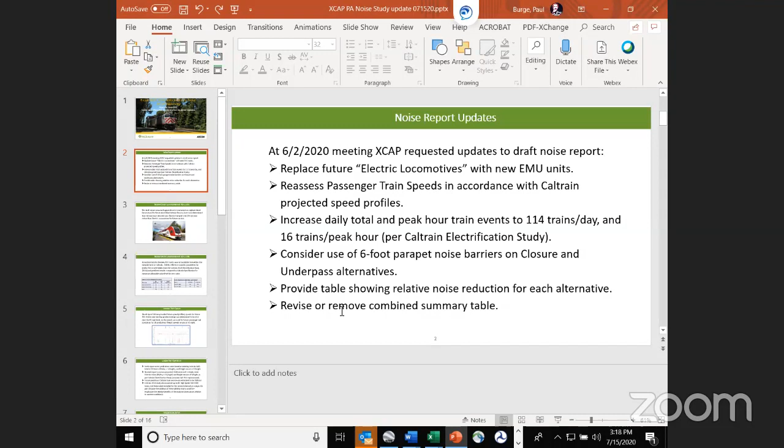Consider use of 6-foot parapet noise barriers on the closure and underpass alternatives, similar to the ones used for Viaduct and hybrid. Provide an additional table showing the relative noise reduction for each alternative in addition to the actual noise level. And revise or remove the combined summary table at the end of the report. And we did each one of those.

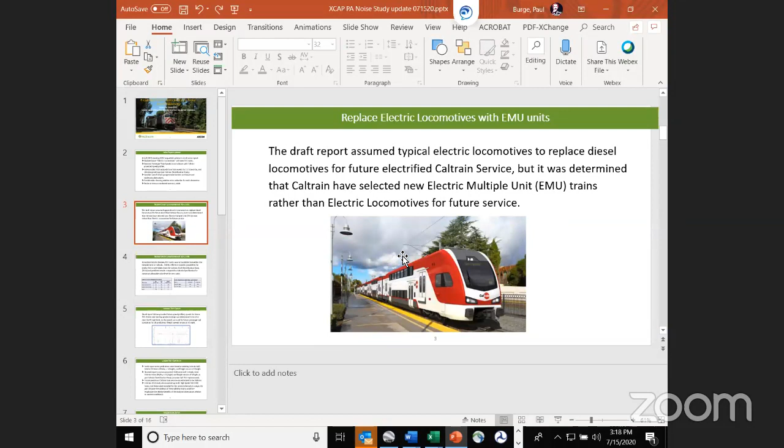So first, with the EMU units, we found out shortly before the original report that in fact they were proposing or planning to use electric multiple unit trains, EMUs, rather than electric locomotives for future use. And so we went ahead and did that. We tried to get acoustical data from the manufacturer for those. It was not available through either them or Caltrain.

But as a fallback, we used the same reference information that was used in the 2014 Caltrain electrification study, which are shown below. And we made sure that if we use those coefficients and reference levels, they would in fact meet the Caltrain specification for the new EMUs, and they do. As you can see in the table, there's two specifications: one is up to 50 miles an hour, one is up to 80. In each case, our predicted levels were at least slightly less than the allowed level. So we thought that was appropriate.

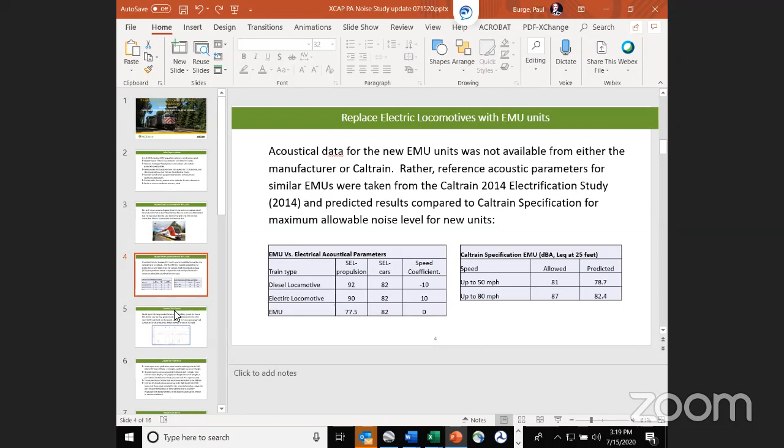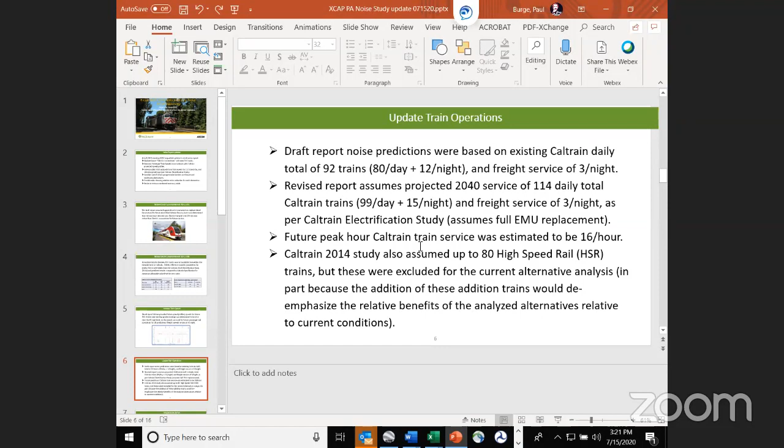Regarding these parapet noise barriers, we were asked to consider using those same 6-foot noise barriers because they were fairly effective for the viaduct and the hybrid alternatives, and they were already part of those alternatives, to also consider using those for closure and underpass alternatives. So we essentially added 2 new alternatives: underpass with barrier and closure with barrier.

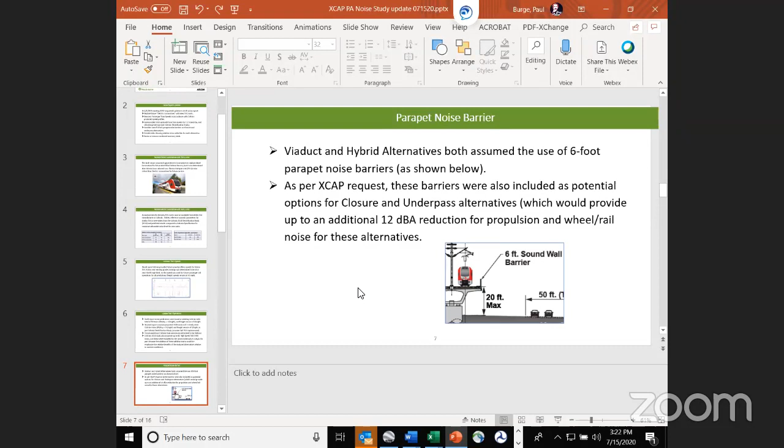You also asked us to include a separate, additional table. Right now, the table we have shows the actual predicted levels for each one of the alternatives. Some folks said they thought it would be beneficial if we could show that same data as the noise reduction over existing. So we added an additional table just after the first one that shows the relative noise reduction as opposed to the actual noise level. That's in the report.

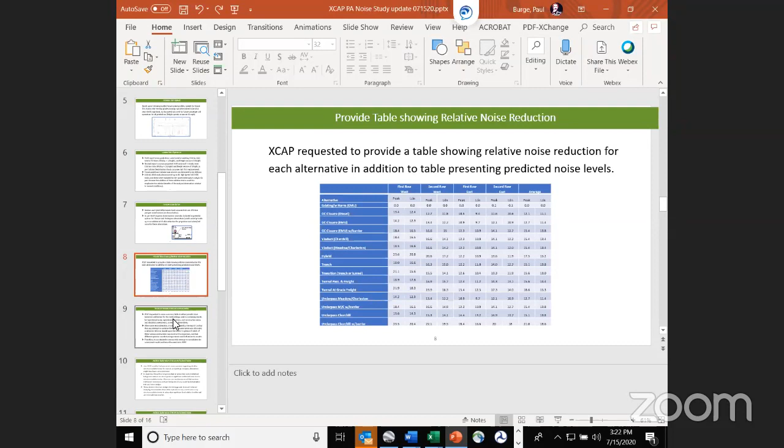There was quite a bit of discussion, probably more than everything else, about the summary table in the original report. This is where we made an attempt to combine the assessment for operational noise, operational vibration, and construction noise and vibration into kind of a single ranking. Some of the comments and concerns were about the weighting we gave - we actually gave more weighting to the operational noise and less to operational vibration and construction noise and vibration.

But after some discussion and some inner reflection, I came to the decision that really any attempt to combine those together into a single assessment would be flawed, and that it included some judgment or value judgment based upon whoever was doing the combination of which of these aspects were more or less important than the others.

After thinking through, I think maybe that wasn't so technically defensible. So I think it was best to just leave that out and leave that to your committee to make those assessments independently, along with everything else you had to consider: cost, traffic, safety, those things. So we just decided to leave that table out.

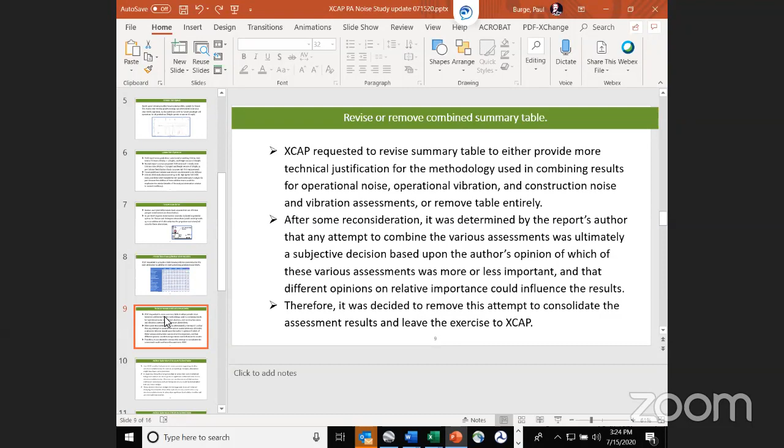I also had a question originally from Keith on one of the questions from the last meeting, and a couple of follow-up emails. Keith, I apologize for not responding to those emails, but I was under the impression that might not have been appropriate to do. I did want to include a little extra identification information on that. Keith had suggested that there would be some radiated sound as the train went over the viaduct, perhaps, and that in fact is probably true.

But I wanted to express that there are several different types of viaduct structures. Some of the older style - not old like 100 years old, but old like in the 60s and 70s - were primarily metal. They can radiate structural vibration noise much more efficiently than some others, because they're fairly lightweight, fairly flexible, and have very little damping. But more modern structures, based on the photos and renderings we were given, and the way modern rail structures are designed and built these days, are based more on reinforced concrete structures. They tend to have much greater mass and much better internal damping characteristics than older style metal structures, and would help reduce the structure related noise.

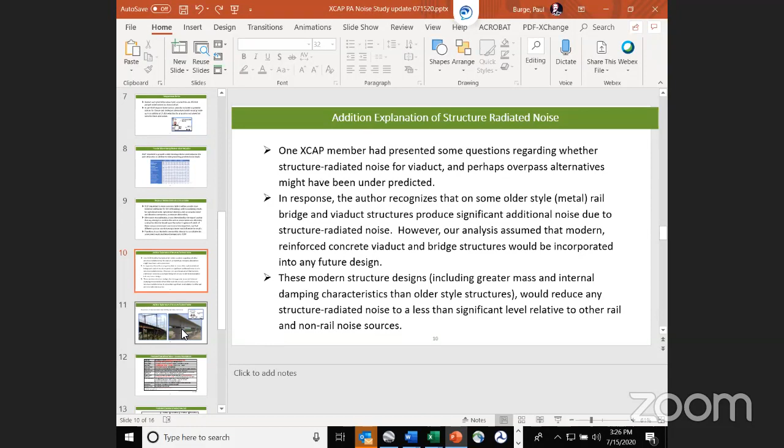I did include a couple of pictures as examples. This one on the left would be typical of a metal viaduct structure or bridge structure, and you do see these around. This is an electrified one, as you can see, and these things are very lightly damped, and lighter weight than the more modern structure, so they do tend to have their own noise source, and it can be, some of the studies I've seen, 15 to 20 dB louder than a corresponding modern structure we show here on the right.

I was surprised that I found a picture of one which is very, very similar to the one that's depicted in the drawings. You can see it's much more massive, has much more mass to it, so it is less likely to have a sharp vibratory resonance.

You can also see that, in fact, in this one here, and as suggested in the drawings we have for the proposed design, they actually do have some bridge bearings in there, which supply some additional damping and isolation. So it would have to be built into the design that these would not vibrate, but most of these modern structures are built that way. In fact, they even usually have ballasted track on top to help reduce the vibration right there at the wheel rail interface.

This is another table that's already in the report, and I highlighted in red the things that changed from the original report. So to repeat, all passenger trains are now 80 miles an hour. Train consists are for 6-car EMUs with 3 powered cars rather than the electric locomotives. Daily trains have increased to 114, which is 99 during the day, 15 at night, same 3 nighttime freights. And I think we increased from 10 to 16 the number of peak hour passenger trains.

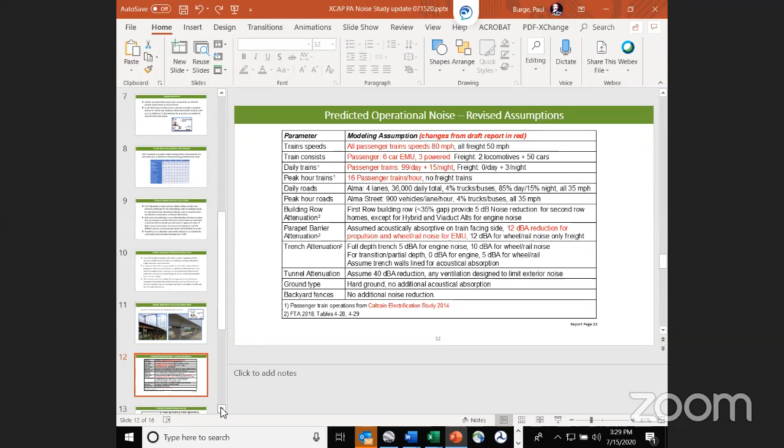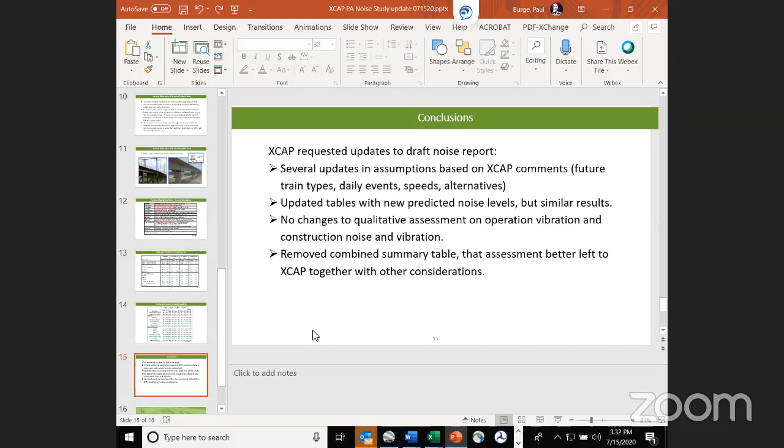And I think that's my report.

One question is about your speed chart where you concluded 80 miles an hour is sufficient, since we didn't get a good look at it beforehand. I know we have trains that stop in Palo Alto and don't stop again until Mountain View. So it looks like, if I'm reading this chart right, those trains could theoretically reach 110 miles per hour.

Well, I was told that regardless of this chart, the maximum speed for the EMUs would be around 80 miles an hour. So while some of them, according to this chart, could from a performance standpoint top out at like 110 miles an hour, I was told separately that they would max out at 80. So I drew a red line across there saying that's as fast as they were going to get.

But obviously, the fact that I drew in the vertical red lines here for where the grade crossings were -- by the time you get to there, the trains are mostly up to that 80 miles an hour. So we conservatively said they'd probably be running at their maximum level at that point.

My understanding of Caltrain, and I think what Nadia's told us before, is that they don't intend to raise the speed limit. But it sounds like with the EMUs, they technically have the capability to make the trains go 110 between as they go through Meadow and Charleston, and that might be something we need to get an answer on outside of this process. Well, that's maybe less relevant for noise and more relevant for safety.

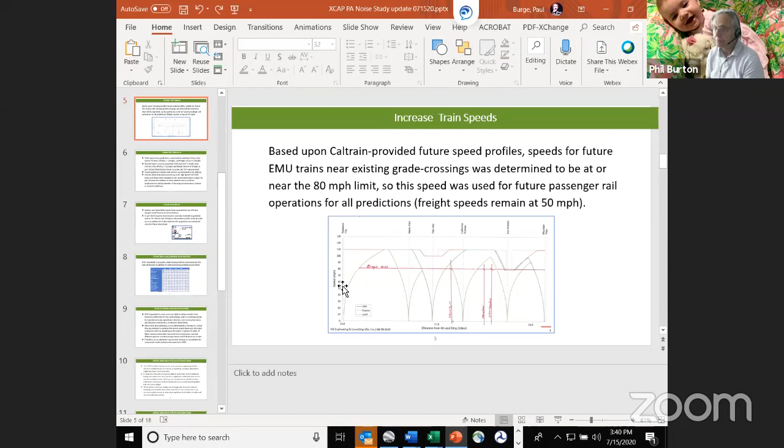Yes, in fact, I would agree that you see that on these speed curves at all these grade crossings, the train can get up to its kind of revenue limit of 80 miles an hour, but that's probably not true for the current diesel locomotives. They would have a different speed profile than this, I think.

Go ahead, Keith. Okay, very good work, overall you did a very nice job. I have some questions on the resonance, thank you for addressing that. But I have a quick question: you mentioned there were 3 effects that by and large kind of cancel each other out. What were those 3 effects again?

Well, they tended to work against each other. Switching from the diesel locomotives to the EMU units, if that was the only change, all the numbers would have decreased because the EMU units produce less noise per pass by, so that would have reduced all the levels. Increasing the speeds, regardless of what type of vehicle you use, wheel rail noise increases as a function of speed, so increasing from 50 to 80 miles an hour would cause the noise to go up.

And then the total number of trains, which we originally assumed using the current 92 Caltrain events per day, went up to 114. That would also tend to raise the overall peak hour levels, because we went from 10 to 16 trains per hour assumption for the peak hour, and from 92 to 114 trains total per day. So the change from diesel locomotive to EMU puts noise levels down, the increase in speed pushed them up, and the increase in number of events also pushed them up. So you had 1 down, 2 ups, so they at least partially canceled each other out.

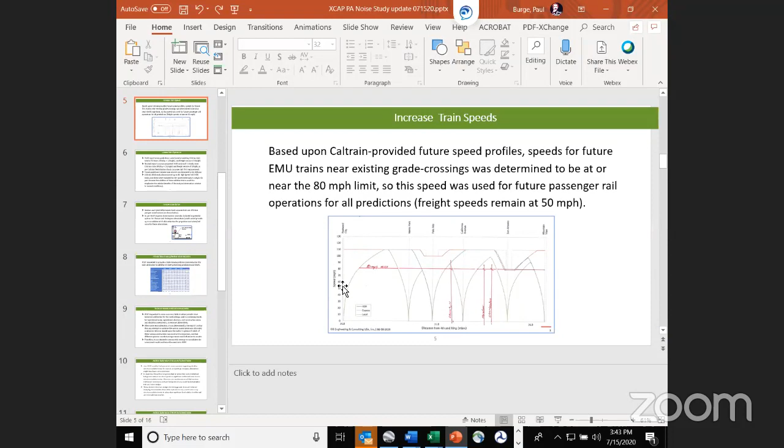But 5% damping is not that bad. I don't think it's linear such that 95% of the energy gets through, but it helps flatten things, kind of like we've been seeing with coronavirus curves—flattening the curve. The idea is everybody wears a mask and it reduces that big peak and spreads it out, so you may have the same number of cases but the hospitals won't get overwhelmed. Same thing with structural resonance: it reduces the peak to a much flatter response. You might have the same amount of vibrational energy, but it's spread out over a wider range of frequencies, which tends to be less annoying.

Well, but you still have resonance, right? It's 5%. If you look at the curve, that's going to be a 10 times magnification at resonance with 5% damping. I also want to suggest there will be some resonance noise, but anytime you're talking about a variety of noise sources, it's the one that controls the noise you actually hear that's the dominant noise source. And if you have the dominant one, the next dominant noise source—the third, fourth, fifth—is probably contributing much less.

So with the way decibels add together, if you have two decibel levels more than 10 dB apart—say 60 dB plus 50 dB—you add those two together and it's still 60 dB. Once you're 10 dB down from the dominant source, it's really not making a contribution.

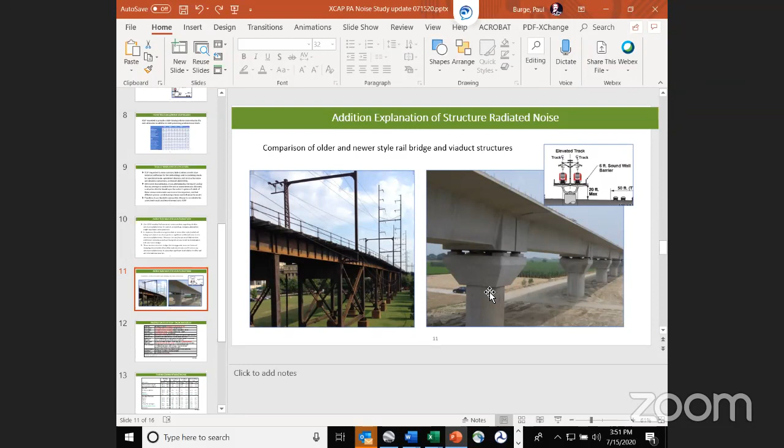So can I ask, for those of us who cannot speak at this level, what you guys are saying—Keith, is there something that would capture what you're trying to get at in a sentence, or are we missing a number, or could you kind of dumb it down for me? What is this report not saying that you're thinking it should say? I mean, these numbers are hard to quantify, and I sympathize with that.

And particularly, they're hard to quantify in a general design. If you had a particular design, you could run a finite element analysis on this and predict it. But I would say you'd want to state what things have been zeroed out here. We know that the parapet effect and the re-radiation of the noise are both non-zero.

I would be happy with that if it was explicitly stated, so someone a year from now doesn't pick this up and think that this table includes all the effects.

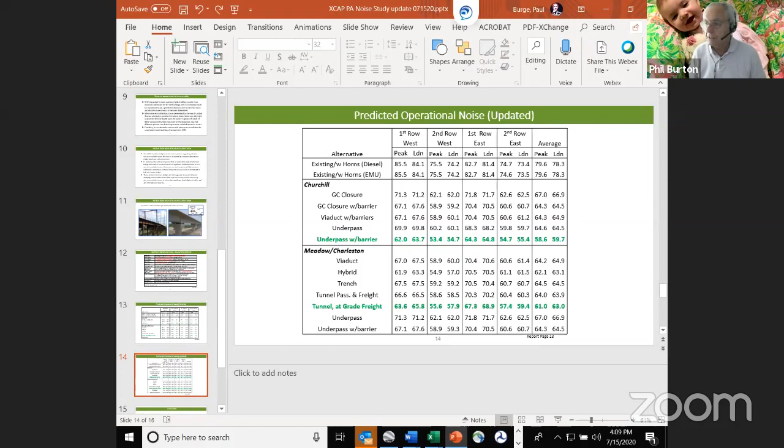Okay, let me make a couple of quick comments. I've never heard of electric MUs that do not have the motors in the trucks, that is the wheel structures of the car. Diesel MUs may have the motors on top of the roof of the car - the famous Budd cars. Right, exactly, that's what you're referring to - that's technically a DMU, of course. On the other hand, electric locomotives often have the motors inside the body of the engine and use mechanical drive to transmit power to the wheels. Whereas with the EMUs, the motors are directly geared to the axles. That would explain the difference in the height of the noise source.

Great. Keith, I see your hand up, and then I'm going to go to public comment, so go ahead - a quick confirmation. When you did the calculations, like for the viaduct, are you taking into account the fact that the viaduct is elevated and how the noise spreads? You have this first row, second row - all those calculations include the fact that the viaduct is elevated, is that correct? Yes. Okay, thank you.

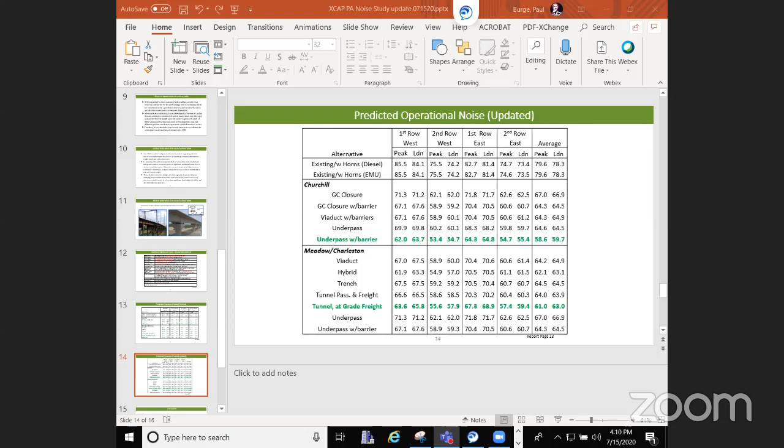Thank you, Chernak. We have Susan Newman, Carlin Otto, Adrian Brandt in that order. Susan, you may unmute yourself now. Thank you, just a second. I lost my notes, so I can't tell you what I was going to say.

I really enjoyed the noise and vibration report. I thought Paul did an incredible job of making everything very clear, even to a non-technical ear.

I had the thought that it might be worth saying somewhere, I'm not sure whether in this report or in the X-CAP report, that if train increases go up as much as projected with high-speed rail and the most advanced vision of Caltrain's future, it would wash out most improvements from not having the whistle and bells for the train stopping and from eliminating the diesel engine. I thought that was pretty interesting.

I'm just going to say this, I don't think it should necessarily change at this point, but I thought it would have been nice to keep the summary suggestions, but break apart the summary analysis to separate construction from operational noise. Maybe that's already there, I'm not completely sure.

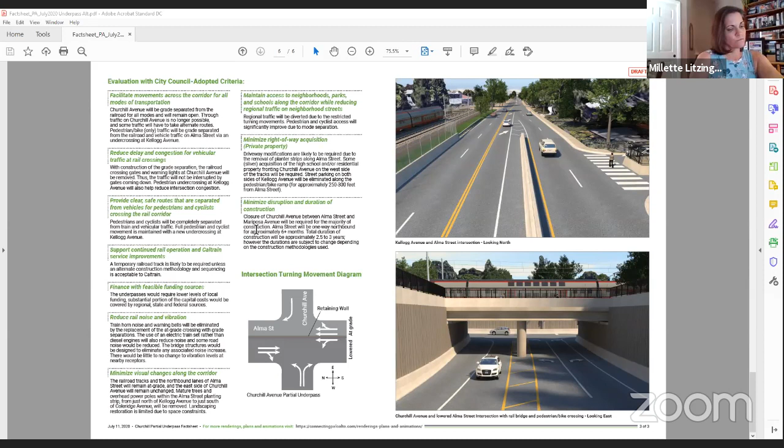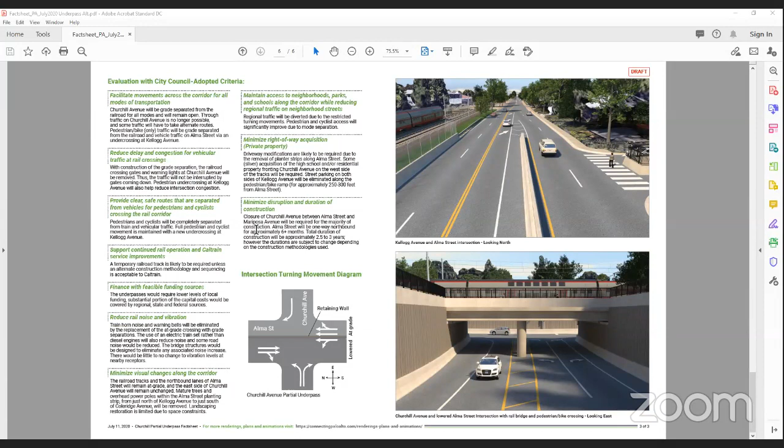Okay, and then while we're on that page, on the upper right, the private property impacts. I really like the fact that we're being transparent here, but there's so much runway between here and wanting to acquire these properties that people may be unjustly concerned. So can we put something in there to say that this is tentative, or this is the current design, something to show this is not set in stone? Because if there's one thing people get upset about, it's the concept of someone coming and buying their house.

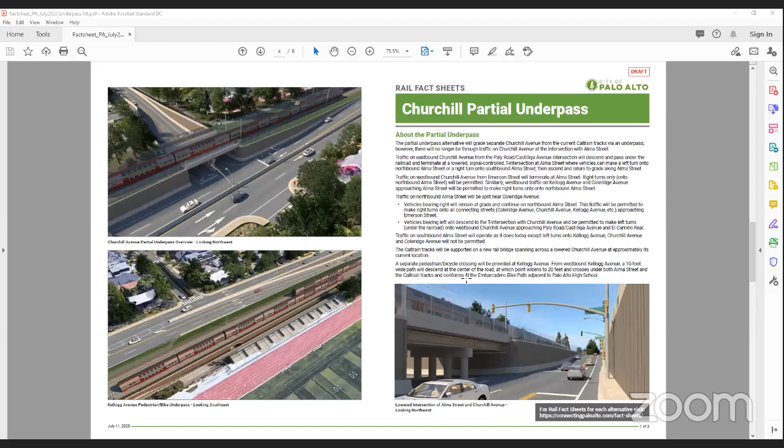Yeah, I think that's the status of all of our alternatives, right? They're all preliminary. So whenever we have this plot, I like saying this is our current best guess, but this best guess is certainly not set in stone. We should let the public know that this is very preliminary. So maybe putting the word potential in front of the title private property impacts would be helpful. I would like that.

I just don't want it to seem like, if you do this alternative, these are likely. I don't want it to seem like, well, if you do this alternative, these are possible, but not necessarily, you know. It's tricky, but I do hear what you're saying.

Millette, does potential in front of that word sound, what are your thoughts on that? I don't have any qualms with that. I think the only problem we potentially have is people may think, oh, maybe there's another way you could avoid acquisition of the property. Yeah, that's what I'm trying to figure out. In some cases, there's really not. Those blue shaded areas are, based on what we're showing now, a virtual certainty.

I think I don't really see any harm in saying potential here. In all likelihood, these are probable. How about conceptual or something like that? Yeah, conceptual might be good. What do you think, Keith? Would that communicate to your neighbors? Like, yeah, I would be happy with that. I just want something to communicate the fact that this is a preliminary design that's not finalized. Yeah, I think conceptual is probably the better one.

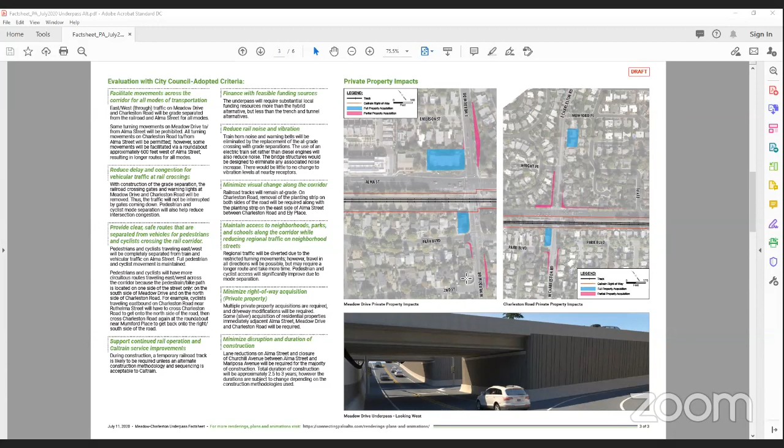All right. Yeah, but we'll let XCAP vote if anyone has anything different. I don't mean to suggest I get to decide. Keith, did you have anything else? No, that's it.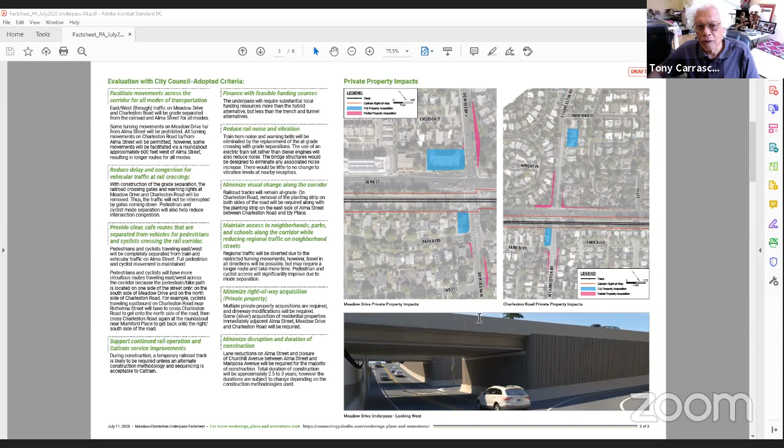Okay, Tony, and then Cari. So my concerns as in the past are the bike ped issue, and thank you so much for making that bike ped path 20 feet wide. I presume that's the same in this Churchill alternative as with the other ones. My issue is that it's not so comparable to the existing because of the slope, but thank you for making it 20 feet wide. I presume that's going to impact some parts of the cost, but I think it's easier to traverse and safer to separate bikes and peds. I'm still concerned about the cost and the slope at 8%.

I don't fully understand how this feeds into the matrix, but in the matrix these are shown as dark blue, and the pedestrian experience is not as comparable as what's existing now. So I think that should be a different color, but that's probably when we discuss the matrix I can bring it up again. I don't want this to be blessed and then say that the matrix must follow.

Yeah, I believe we're calendared to do the matrix at the next meeting. Okay. Tony put his hand out, so I'm going with Cari and then Phil.

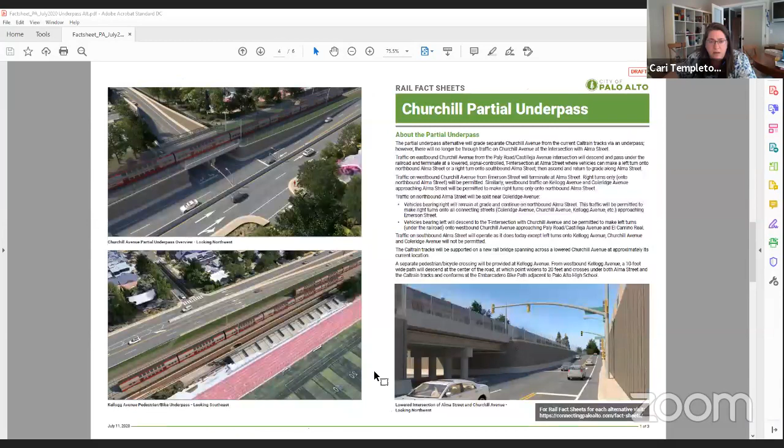Hi, I really like a lot of these updates. The one piece of feedback I had worth sharing is there's some inconsistency in your legends from map to map, and that may cause confusion. So I wanted to encourage you to reserve a color for one kind of thing. For example, on page 2, we have the fuchsia, a magenta color, being used for two different things right beside each other. On one it's partial property acquisition on Churchill, and on the other side of the page it's pedestrian bike ramps and sidewalks. So if it would be possible to be consistent throughout the fact sheets, I think that will really help people understand.

And while we're on that subject, on the part with Churchill and the Embarcadero bike path, it is hard to discern between the red and the magenta. So throwing that out there as well, just as a piece of formatting feedback. I know that's not exactly what you're asking for, but throwing that out there. Thank you.

So I'm not sure where you're... oh, the red and the magenta right next to each other? Yes, so there's two pieces of feedback. One is if magenta means partial property acquisition on one map, it would be ideal to have it on all the maps. And then the other was an example on any of these pages where you have red and magenta together - it is hard to tell the difference. I can see it on my screen, but I'm imagining if it was printed out, there may be some people for whom it may be difficult to discern the difference between those two colors. If you're going to be relooking at colors, that may be something to consider.

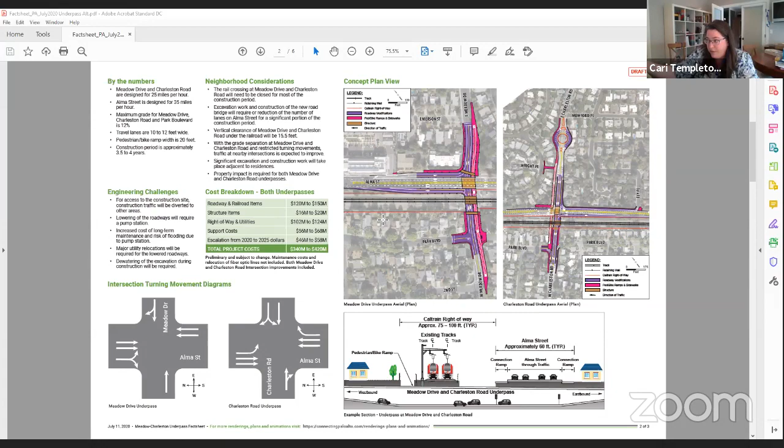I'm not seeing it on here. Okay, the bottom of it's just the line for Caltrain right of way. Yes. Okay, got it. Yeah, it's not a big deal, but I wanted to point it out just in case, because it is hard to tell the difference. I'm looking on the bottom of page 2 where you have Churchill and Embarcadero, and it looks like the same color. I was trying for a few minutes to figure out why the Caltrain right of way is a partial property acquisition - like, what's the relationship there? I understand one's a filled block and one's a line, but because the colors are so similar, my mind automatically went to some kind of connection when there's not. I don't think there's an implication here. Okay, that's a fair comment. Thank you.

Phil, you're next. Okay, can you hear me now? Yes. Okay, so first I just want to say that I think these new data sheets are really significant improvements. And in particular, I like the traffic movement because that really clarifies the issues in a way that's simple for people to understand.

About the labeling of property acquisitions, something like conceptual - I have no idea what that means. If we said something like preliminary, subject to further analysis, then I might know what's going on. So I would like to suggest that wording instead of conceptual or possible, because as Peter said, right now these property acquisitions will probably happen. Okay, those are my comments.

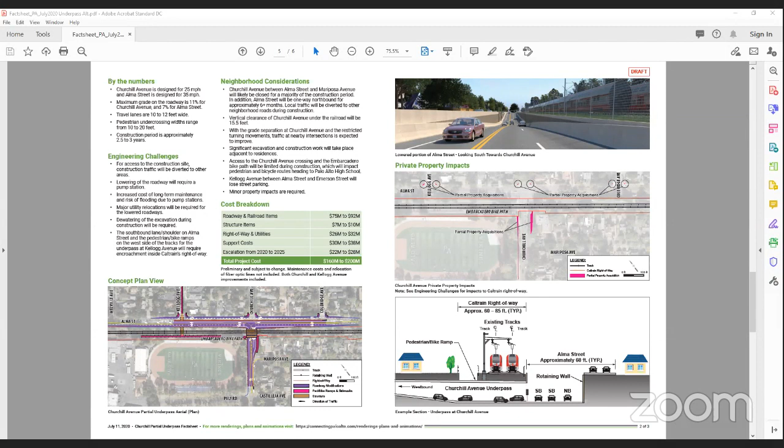Thank you, Phil. Keith, your hand is still up electronically. I don't know if you had something else or if that was just a leftover. I have some lag in my mouse here, and I'm muting and unmuting myself repeatedly. It's just a leftover. Thank you. Okay, great.

Did we have any other ex-cappers who had questions or wanted to make suggestions for the rail fact sheets?